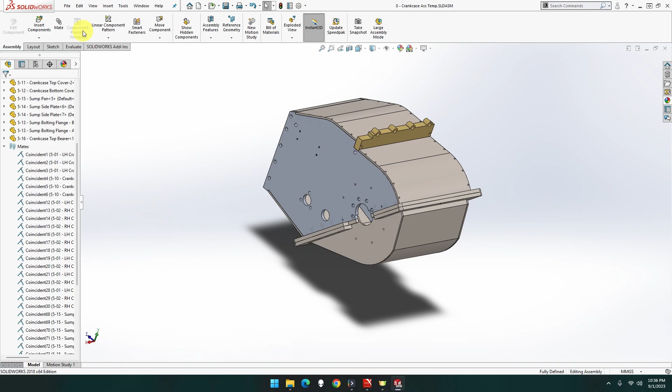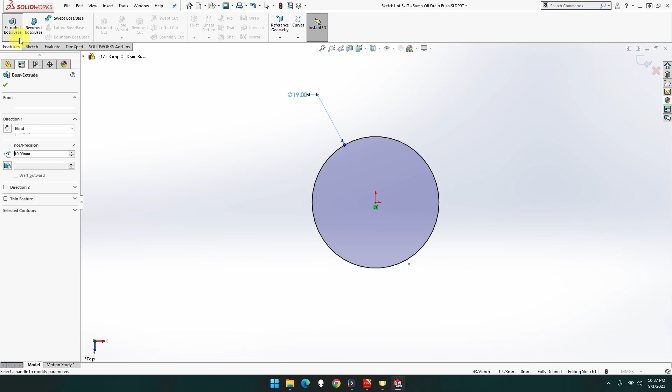Alright, so file new, part MMGS. Okay, let's go top, view, sketch, circle, let's do, it's going to be dimension of 19, it's going to go down 10 mils, feature extrude, 10. I'm not going to worry about doing mid-plane.

Sketch on the bottom part, another circle. That's going to be, it's going to be 15. 15 mil. It's going to be feature, extrude. That's going to be extrude 3 mil.

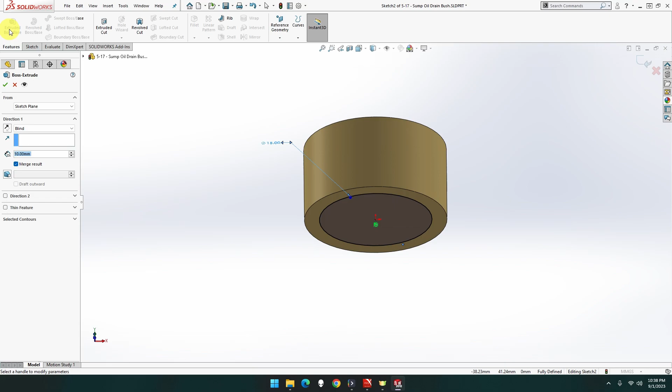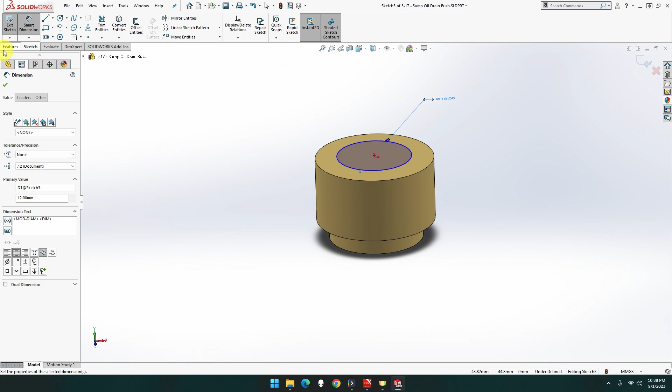Then on top here will be sketch, circle. That's going to be 12. Really? 12, thank you. That's going to be feature, extrude, cut, through all, and done. There we go, that's there.

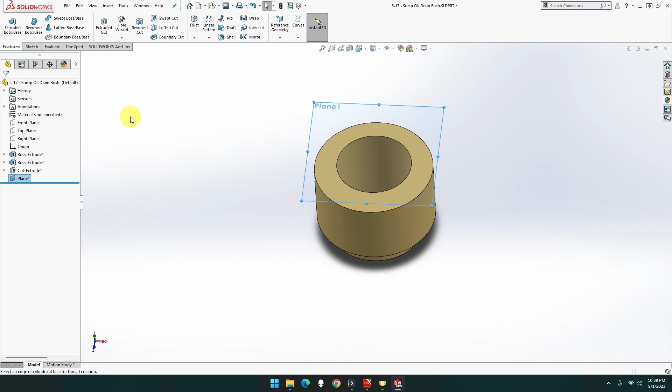Now we need to go to thread. Actually, we need to do a plane on top of there. Done. There we go, thread. We want that circle, that plane,

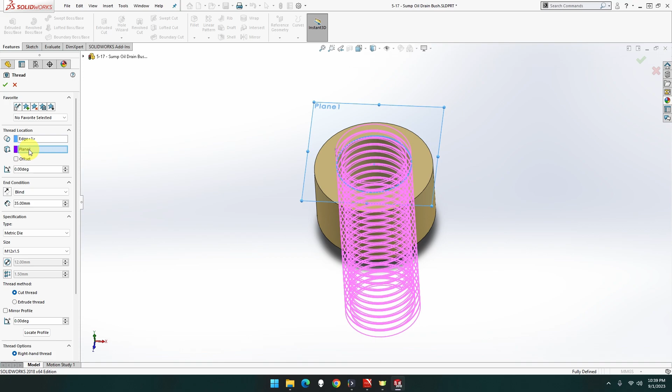blind all the way through, excellent, but it's going to be 12, go up to M12 by 1.5, and that's going to be extrude, cut or trim, miss one, there we go, and done. Hide you. And there's that part done. Excellent. That is actually done.

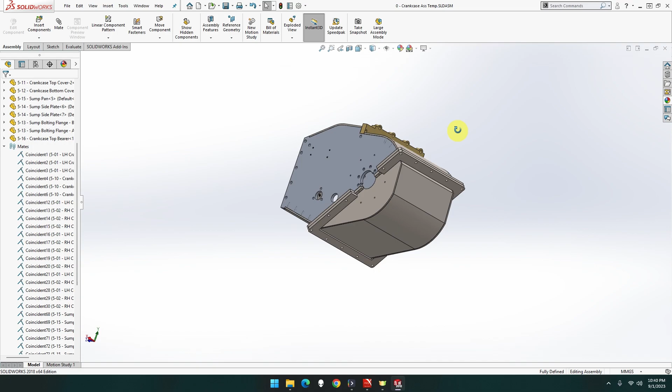That is part 5-17, the Sump Oil Drain Bush, done for the Clayton Undertype steam wagon. So that part will actually go over. That part will go. Oh, I never put a hole back in that. Let me fix that right now. I forgot I never put the hole in that. Let me go on this part here.

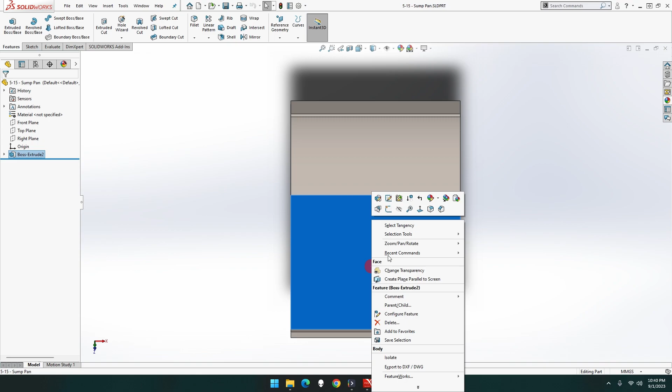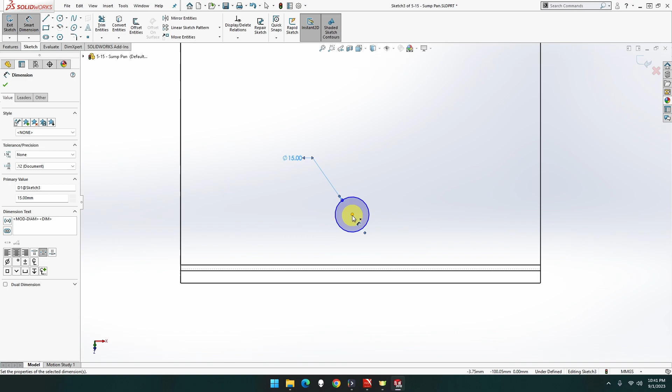We want normal, sketch. Let me zoom in. Let me go to hidden lines. There we go. So we want, that's going to be 15. 15. That's going to be 15 from, that's going to be 12, sorry, from there to there, 12.

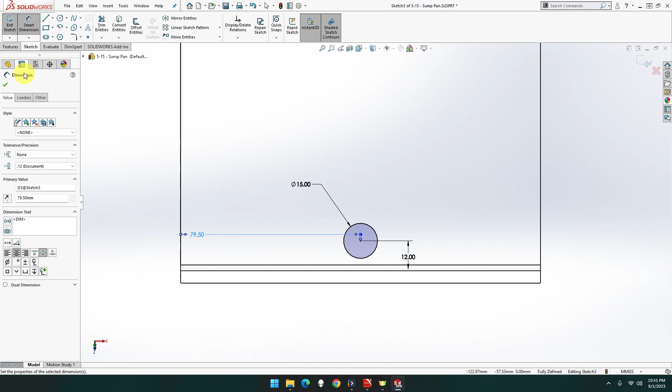And where's the halfway point? That one, and that one will be not too good. Okay, not that one. Maybe that one. Nope. Okay, 79.5. Let's go halfway. 79.5, feature, extrude, cut, and through all, and done.

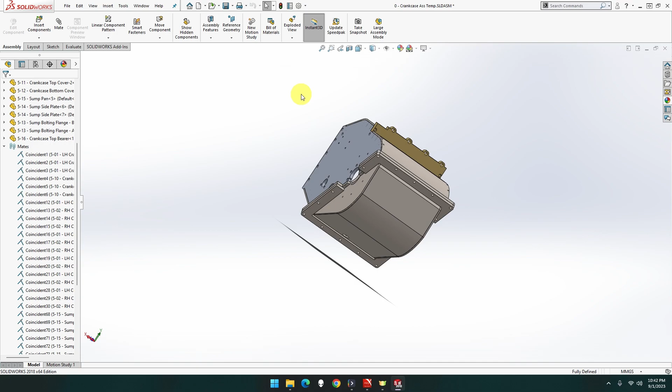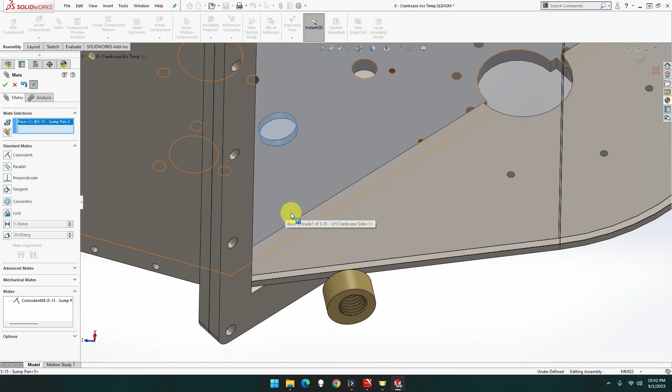That one, there we go. Okay, close that one down. Rebuild, why didn't that rebuild? Ah, it's on this side. Let me bring that one in to about there. Now we want mate this to rotate. Beautiful. Now we want that cylinder to that cylinder.

There we go. Now it fits in, there's a gap. Beautiful. It's not hitting anything. Excellent. That part's in there. Okay, that part is done. So that's definitely worked in good.